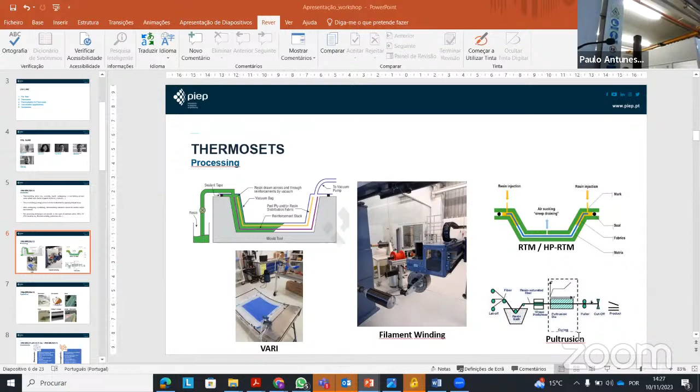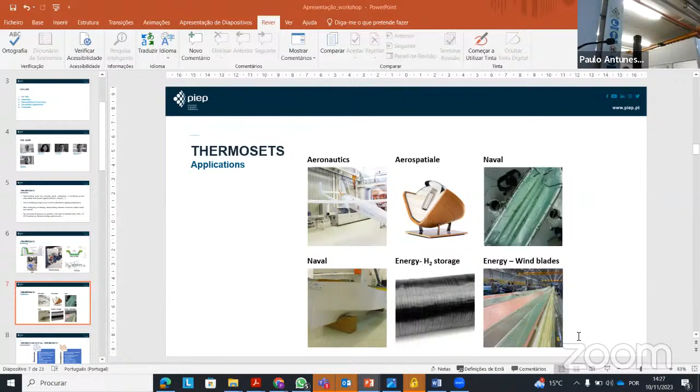Os materiais compósitos e os termoendurecíveis têm um campo de aplicações muito grande. Aqui foquei alguns dos campos de possível aplicação: aeronáutica, aeroespacial — esta é uma cápsula que vimos durante a visita, um projeto da ESA desenvolvido no PIEP, onde há uma estrutura primária feita com compósito de fibra de carbono. Indústria naval, aqui há um barco produzido também no PIEP. Wind blades, feitas por infusão por vácuo. Existe uma panóplia imensa de aplicações dos materiais compósitos de fibra contínua e das resinas termoendurecíveis.

As grandes diferenças entre os termoendurecíveis e os termoplásticos vêm das suas ligações moleculares. Um termoplástico tem ligações covalentes fracas entre os seus monómeros, e num termoendurecível há sempre uma reação de cross-linking entre as diferentes cadeias moleculares, que estão numa rigidez bastante elevada. O cross-link é que dá aquela rigidez, mas também provoca o problema de que, quando fornecemos energia térmica, não os conseguimos fundir. Tal é a resposta das ligações covalentes.

As resinas termoendurecíveis normalmente são rígidas, frágeis, mas também bastante resistentes. Novamente, a inter-relação entre as características moleculares e as propriedades mecânicas vem do cross-link, que lhes dá bastante rigidez. É um material com reduzida dependência viscoelástica — as propriedades variam com o tempo, mas não tanto como num termoplástico, havendo aqui uma vantagem. São quimicamente e termicamente bastante resistentes, mas têm essa grande desvantagem: não são recicláveis, do ponto de vista da circularidade.

Os termoplásticos têm ligações covalentes fracas entre os monómeros, não existindo ligações entre as cadeias poliméricas. Têm uma temperatura de fusão ou de amolecimento inferior à temperatura de degradação, o que nos dá a possibilidade de os processar, de outra forma não conseguiríamos. É o que acontece nas resinas termoendurecíveis, que se degradam. São estruturas semicristalinas ou amorfas, dependendo do material, existindo materiais semicristalinos e materiais amorfos — tendo aqui uma grande diferença para os termoendurecíveis.

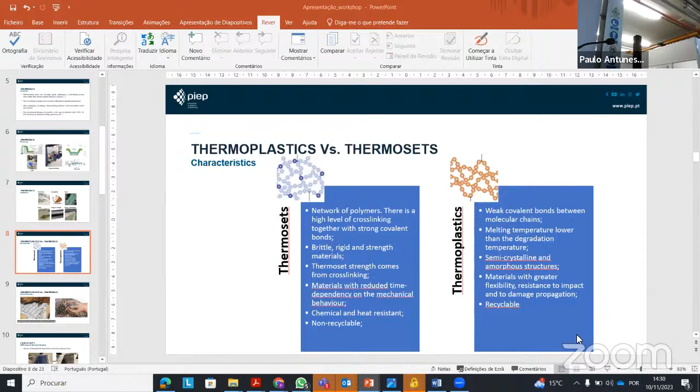Este é um problema grave que está a acontecer neste momento e que deve tentar ser minimizado. Já existem alguns trabalhos nesta área, principalmente um projeto europeu com uma pá de cerca de 62 metros, integralmente produzida em resina termoplástica líquida. Já começa a haver um caminho na circularidade e sustentabilidade destes materiais.

Estamos a falar aqui de um problema grave, não só este, mas de volumes de material muito grandes — estamos a falar também de barcos, de componentes de grande dimensão e grande volume, que são aterrados na realidade. A tentativa que se está a fazer é que estes materiais entrem na economia circular, e que no fim de vida seja feita a sua reciclagem mecânica ou química. O Gil François vai falar um bocadinho disso, da parte da reciclagem química, para depois transformarmos em produtos de maior valor acrescentado.

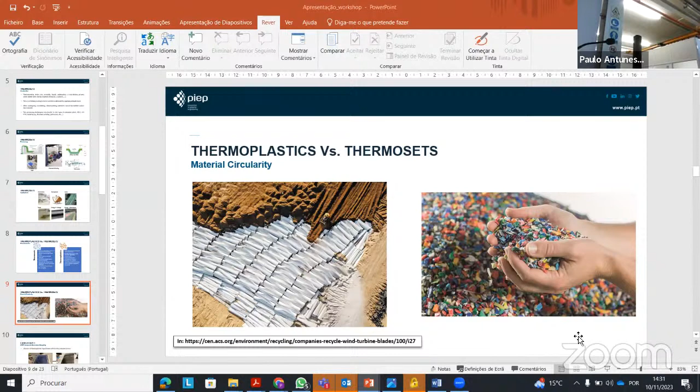Focando agora nos case studies, alguns casos de estudo que fazemos cá no PIEP: a nossa principal preocupação era saber que propriedades do material conseguimos obter do material infundido com uma resina termoplástica líquida, e saber quais são as propriedades mecânicas que podemos potenciar e utilizar no fabrico de outros produtos.

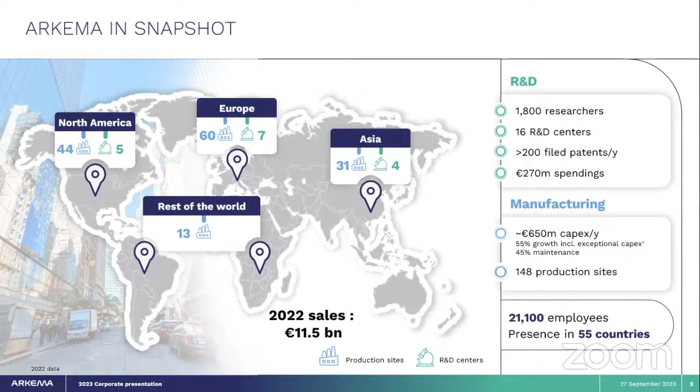In terms of R&D, it represents 1,800 research people, 16 R&D centers, and we have more or less 200 new patents per year.

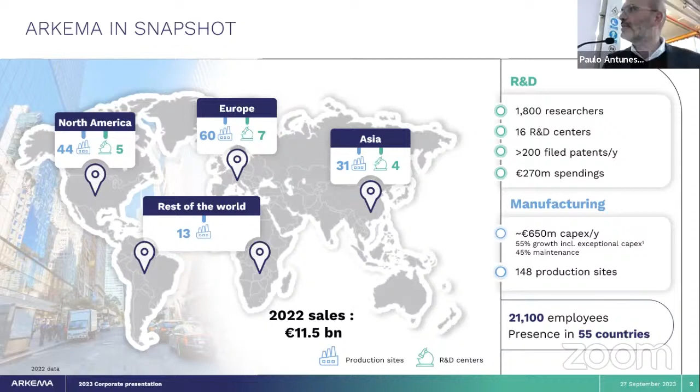In terms of activity, we have three main segments that we call advanced material, adhesive solution, and coating solution. Advanced material, I don't want to go into detail because this is not the topic of today, but just to give you a general idea of the company.

Advanced material is mainly everything dedicated to polymer. We'll talk today about Elium, which is a small part of Arkema. But the main polymers are obviously polyamide. We have different grades, polyamide 11, 12, PEBAX, and so on. PVDF, PEKK. After that, we have adhesive solution.

We are quite well known for our trademark Bostik. Maybe you know this name because it's a public product. I think a lot of people know Bostik. It belongs to Arkema.

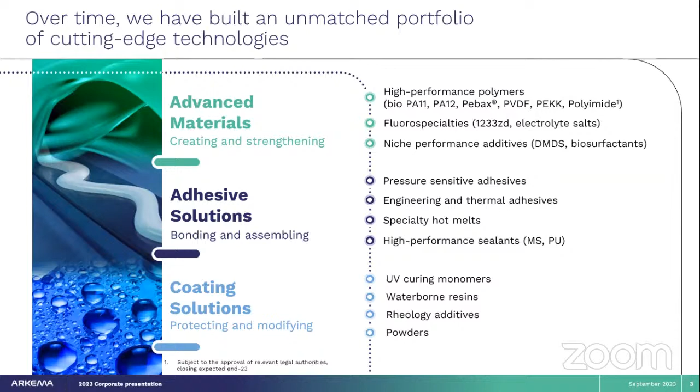The last one, I have to say, is the rest of the activity, what we call the coating solution. And we can find a lot of products like monomer, rheology additive for PVC application, waterborne resin for external application, and powder.

If we focus a little bit on the thermoplastic polymer, because Arkema is only involved in thermoplastic polymer, we have different trademarks. PEBAX is well known for sport application. A lot of ski shoes or sport shoes are made with PEBAX. PEBAX has the particularity of being made with castor oil, which is really a bio product.

So Elium, we will speak about after. Rilsan, this is polyamide 11 in a tape, which is mainly used for development in battery to make a hydrogen tank. Kepstan, this is a PEKK, similar to PEEK, which is well known for aeronautic applications with very high heat resistance.

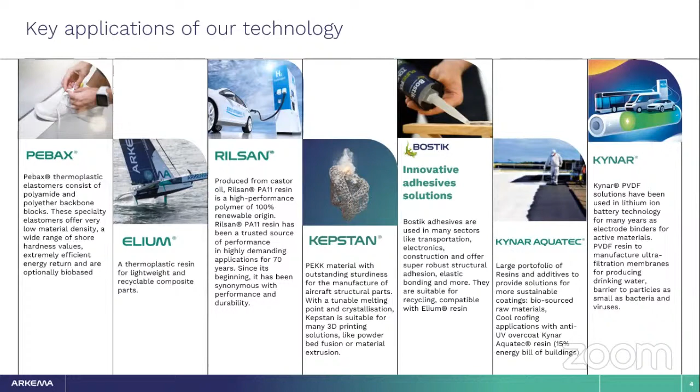Bostik, the glue. We work a lot and closely with Bostik because, as you can see later, this is a very good way to assemble Elium with Elium or with different parts, because this is the same chemistry - methyl methacrylate. Kynar Aquatec is like a paint for external application, and Kynar is a PVDF product.

So once again, very shortly, as you can see, we are mainly specialized in specialty products. At the beginning of the company, we had a lot of commodity products, and progressively we switched to specialty. So today it represents 91% of our sales.

We are present in different markets, as you can see on the graph: electronic, automotive, industry, building, and so on. And we have a very good balance between the three continents, because almost 33% for Asia, Europe, and North America.

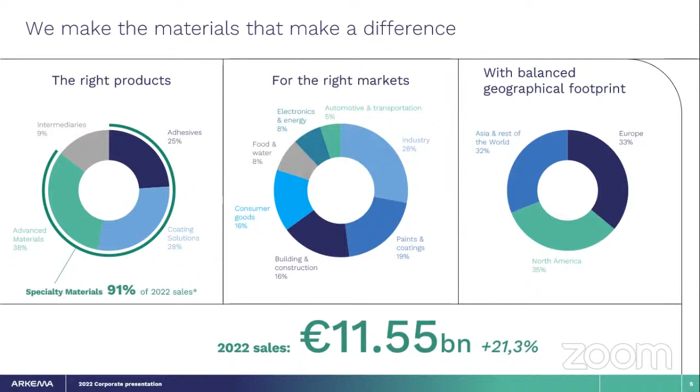Now, if we focus mainly on the Elium resin, so what is Elium? Elium is the only one thermoplastic liquid resin available on the market. What you have to keep in mind is that Elium, in terms of process and characteristics, is very similar to vinyl ester resin.

The performances are very close, and in terms of process, this is the same. You have the resin, you add the peroxide in the resin. As soon as you add the peroxide, you start the polymerization - this is a radical polymerization - until the final polymerization. It's very easy to handle.

Of course the main difference is that this is a thermoplastic product, and not a thermoset, which was explained very clearly just before by Paolo. So we have very good performance, mechanical performance, and particularly very good impact resistance. We have a lot of development in this area, mainly for sport applications.

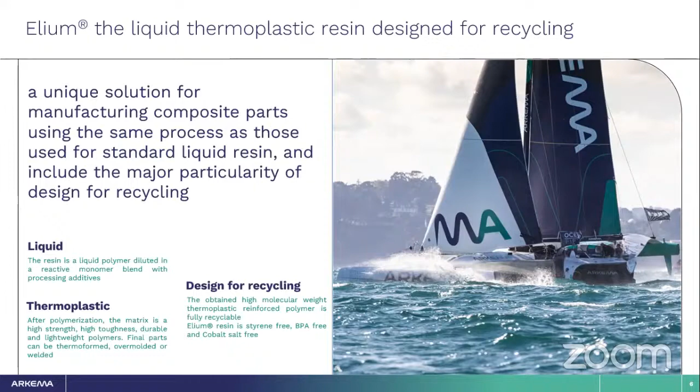And last but not least, there is recycling, because this is the main argument today. Everybody wants to produce parts which are able to be recycled at the end of their life.

Next slide, you have a view of the different businesses where we are present today. Number one is obviously wind energy, because wind blades - almost all wind blades - are made with epoxy resin, and it's very difficult to recycle this blade at the end of its life.

So Elium resin is a very good alternative for that. We have a lot of demonstrators, a lot of development in this area. It's a long-term development, but we already produce several blades. We have a good collaboration with the LM company - I will show you some information just after. After that, the second business is marine.

It's a quite funny marine application, because when we started with Elium a few years ago, I visited the boat manufacturer, and we tested the product together. But at this time, they were not really motivated to use a new resin due to the change and the price. For 2 years now, due to the change in terms of rules and legislation, and the necessity to recycle, they came back to us, and we restarted a real partnership to use Elium for both businesses. We are very happy now, because we have a very good collaboration, and they did a lot of announcements and newsletters with a company, Beneteau.

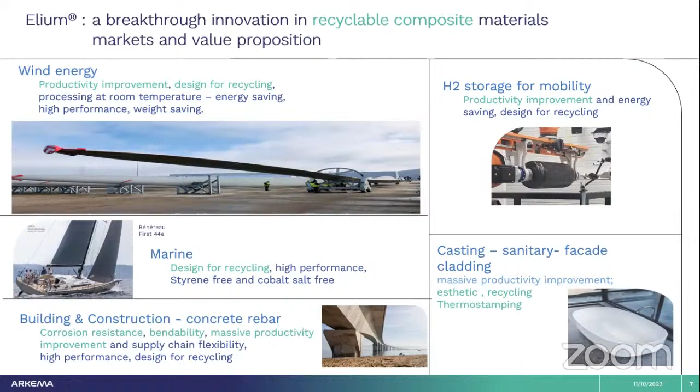Just to continue on the resin, what's interesting to know is that we are able to adjust the viscosity depending on the process. So for instance, for infusion, we have a viscosity of more or less 100 centipoise. For pultrusion, it could be 500. So really, depending on the process, we are able to adjust the viscosity.

After that, the reactivity, this is the same, we can change it from 2 minutes to several hours. To be precise, 2 minutes is really particular, this is for pultrusion, or for CRTM, for automotive parts. In this case, it is necessary to use a cocktail of different peroxides, and of course to heat the mold at a temperature around 100, 110, or 120 maximum. But we have the possibility to produce a composite part in a very short cycle time.

Peroxide, this is the standard product available on the market. After that, we will use one or the other one, depending on the request of the customer.

To finish on the fiber, almost all our customers are using glass fiber, because if we come back on the market, when we talk about boats or wind blades, they use glass fiber. So this is really the main business. But we know that Elium is compatible with carbon fiber, of course, though you have to use vinyl ester sizing. It's very important to have a good compatibility between the resin and the fiber. We also have other developments with natural fiber like flax, bamboo, for what I'd call a green concept.

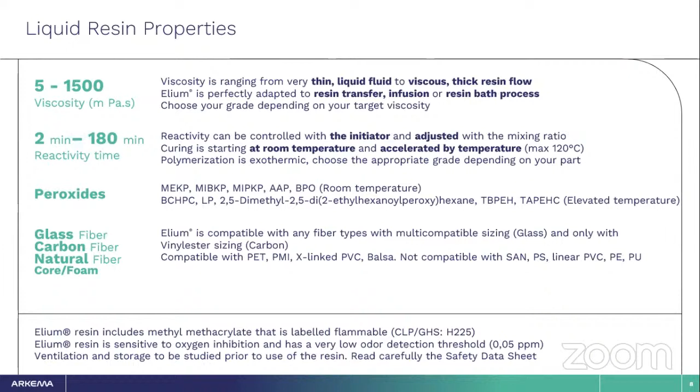To come back on the process, as you can see, we are able to propose some solutions for the different processes.

I just want to be clear that one process is not present on this slide: hand layup. Hand layup doesn't work with Elium, because Elium polymerization is inhibited by the oxygen of the air. In presence of air, you don't have a polymerization. I will show you just after, but we have a special grade for repair.

This grade is not so sensitive to oxygen of the air because customers, mainly boat manufacturers, say: okay, in case of damage, how can I repair it? I do not have a possibility to make an infusion when I am on the ocean or on the sea. So we have a special grade, but this is just for small areas, okay?

So if we come back to the standard process, infusion, this is really the most compatible process with Elium. We use it for boats, for wind blades, for automotive parts, but for small automotive parts.

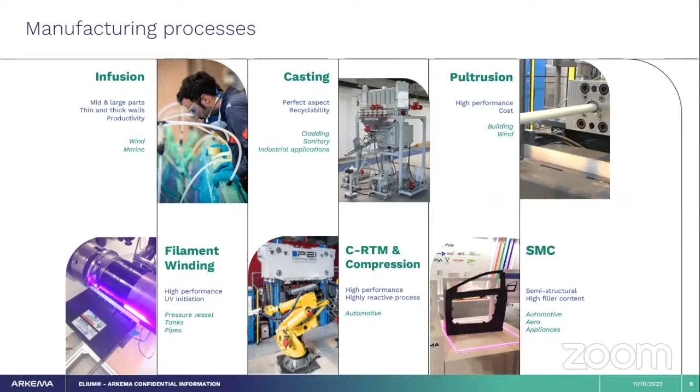Here you have a view of the different resins available at the moment in our portfolio. As you can see, we have two families: a family for room temperature process, and the other one for hot process, for pultrusion, for CRTM, and so on. After that, we have different families depending on the request of the customer and the type of peroxide and so on.

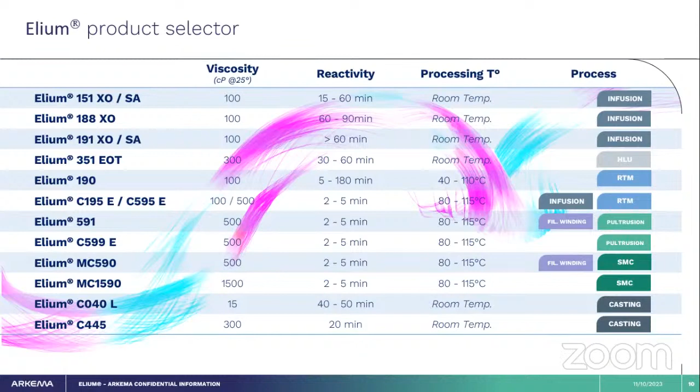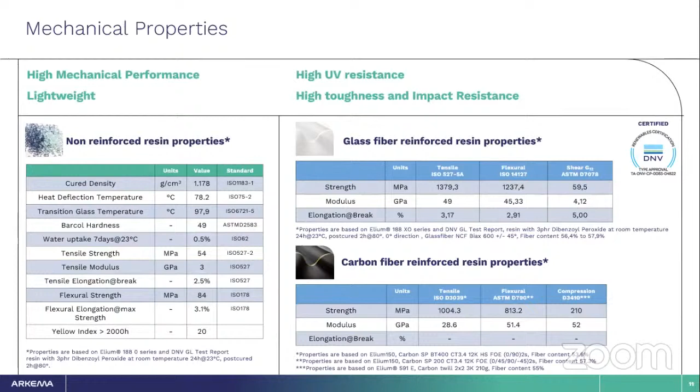So if we come back to the process, okay, this is general information, but just to keep in mind, because I know that Polo will show you the infusion process. This is the main process for composites.

Generally we recommend using a temperature of at least 20 degrees Celsius, because if the temperature is too low, polymerization will take a lot of time, and if it's too high, it will be the opposite.

We suggest doing a post-curing after the polymerization to reach the optimum result. I know it depends on the size of the part. For a boat, it's quite complicated to have a very big oven, but for small parts, when you have the possibility, it's better.

Release agent, this is something very important because acrylic resin tends to stick. So it's important to use the suitable release agent. The majority of our customers use release agent and gel coat for the parts. All the gel coats are compatible with Elium, it's not a problem.

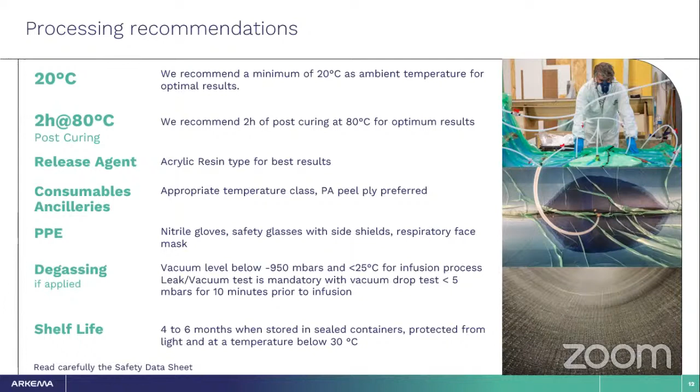Consumable ancillary, this is a standard product. Degassing, okay, it is better to do it if possible, but if you don't, it works, no problem.

The post-processing is something very important because it's thermoplastic, so you have some differences. The first one is in terms of machining. When you want to trim and drill the part, you can use a conventional tool.

Generally, this is a diamond disc to cut properly. But you don't have to go too quickly, otherwise the material will melt during the cutting. So you have to go quite slowly, or use a cutting system with a cooling possibility.

On the other hand, the main advantage is that you have no dust in the cutting room, which is a real advantage for the people in the workshop, since you do not have any dust.

For bonding, all the adhesives are compatible with Elium, so you can use polyurethane, epoxy, whatever you want. But we suggest using a methacrylate resin because in terms of compatibility, it's better, and in terms of recycling, because it's the same chemistry, it's easier. Something else interesting is that you do not have to do any preparation on the part, which could be a real benefit.

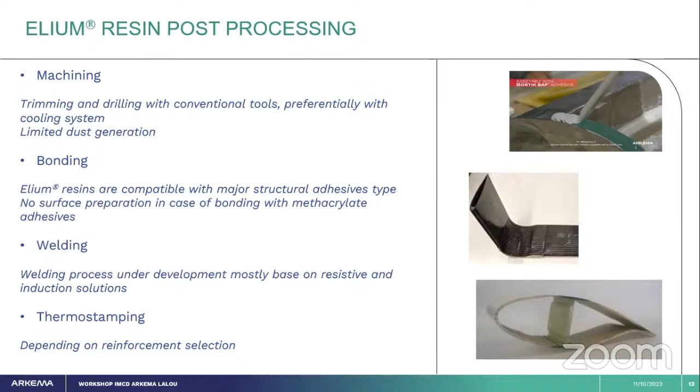Here, this is some major project. What we call the Zebra project is a European project. You can see on the picture the wind blade. This is 62 meters long. It's a quite big one.

Totally made with Elium at LM Wind Power in Spain, in collaboration with different partners like General Electric, Owens Corning, ENGIE, and so on. It's a real success. I think last week or two weeks ago we produced another one, 92 meters long. It's incredible, 92 meters long.

Beneteau, I already talked about Beneteau. It's a real success, and we are very happy for that because this is really a reference for us.

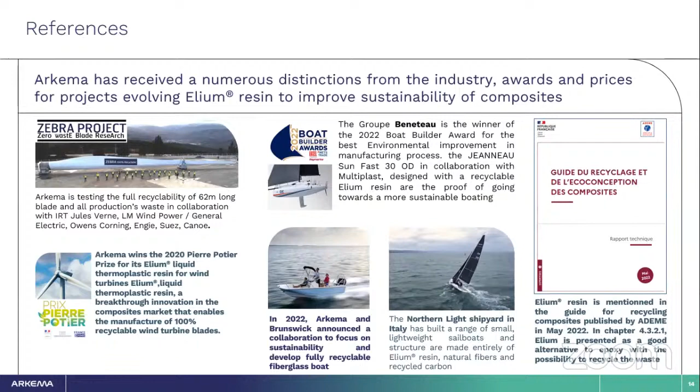In the US, we are working closely with Brunswick. Brunswick is maybe number 2 or number 3 in the world to make boats. So we have a good collaboration with Brunswick, and we have several boats made with flax, the natural fiber. We also have a good partnership with Northern Light company, an Italian company who has built several boats and attends different races.

Just to finish on Elium, to give you some basic information about recycling. We focus a lot on the boat because we have quite a big quantity of data on this. It's a real problem now, the end of life of a boat. Nobody knows how they can recycle or rebuild a boat. Dismantling the boat is a real problem.

I like the curve on the bottom, you can see the number produced depending on the year, and the end of life of the boat at 30 or 45 years after. We have to find a solution for that.

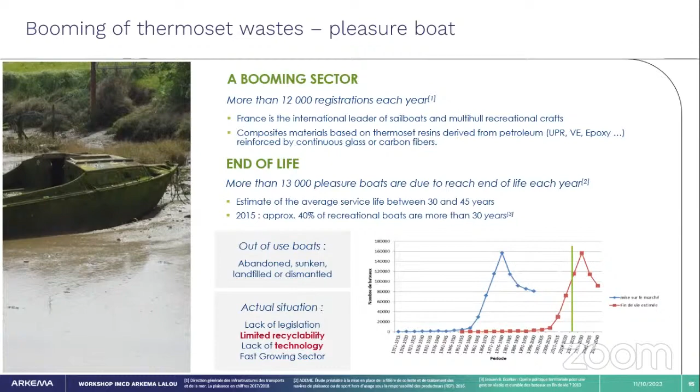I don't want to go into detail on this because different organisms already exist. One is very famous in France, called APER, and they are in charge of finding solutions for the dismantling of a boat. Of course, we are working closely with them, and you can have a look on the website if you are interested. It's really something very important.

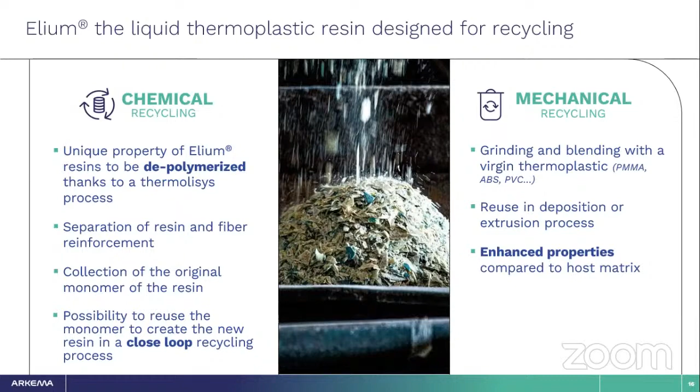Regarding recycling, we have two ways: the first is chemical recycling, and the second is mechanical recycling. I don't want to spend time on mechanical recycling because Paolo or someone from PIEP will introduce this subject in detail. I prefer to focus on chemical recycling.

One of the interests of chemical recycling, maybe it's better to show you. What is it exactly? Chemical recycling is what we can call a kind of depolymerization or thermolysis. It's not something new, because this process is currently used to recycle or depolymerize methyl methacrylate for a long time. But the difference today is that pure methyl methacrylate is not a problem because you don't have any external product and it's not a composite. As soon as it's a composite with different products, it's more complicated.

So based on this process, Arkema and some partners work to develop and promote this process. So what is it exactly? You produce the part, you have a composite part, and at the end of the life of the part, you have to find a solution. So the first step is always the same: this is the grinding. You grind the part to get small particles.

I can show you how we produce a small particle, and all the small particles are put into a reactor, like you can see here, at a temperature around 350 or 400 degrees Celsius. At this temperature, you will have a depolymerization, meaning you will be able to recover the initial monomer, the methyl methacrylate.

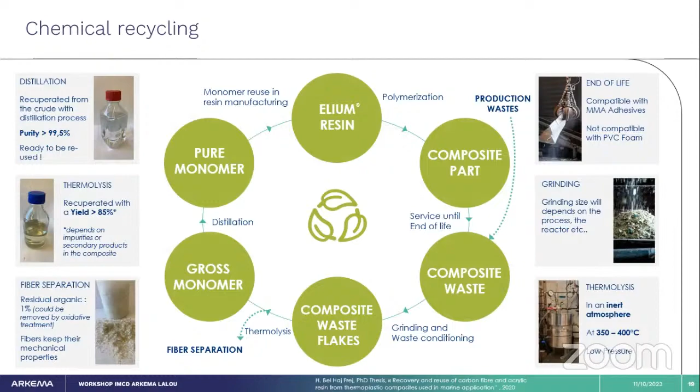Just to give you an idea, when we talked just before about natural fiber, it doesn't work with this process, because you cannot imagine what happens when you heat the flax or a bamboo at 400 degrees. You have a full degradation of the product. This full degradation creates some impurities which affect the yield. So we have to know exactly what to put in the reactor.

I come back on this because it's interesting as well: when you make a part by infusion, you know that you have some waste. This waste is coming from the tube, from the film and so on, and it represents something between 5 and 10% of the total weight of the boat.

And with the depolymerization process, you have the advantage that you are able to recover this resin. It's an advantage because when you are a big player in terms of boats, they have really several hundred tons of waste per year, and they have to find an alternative.

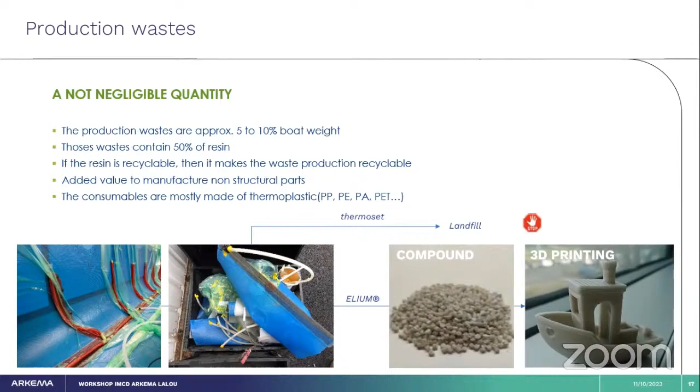I don't know if Paulo plans to discuss it, but I like the small boat that you can see on the bottom of the slide. This is a new development ongoing: 3D printing. So when we talk about mechanical recycling, instead of producing a flat panel, you can make a compound, extrude it to make a profile, and this profile can be used by 3D printing to make a new part. I think it can be an interesting process as well in development.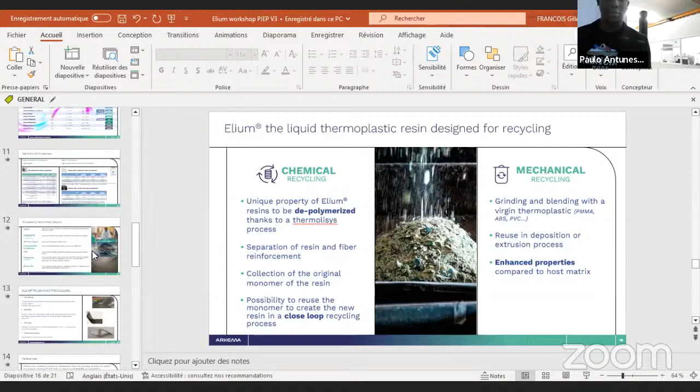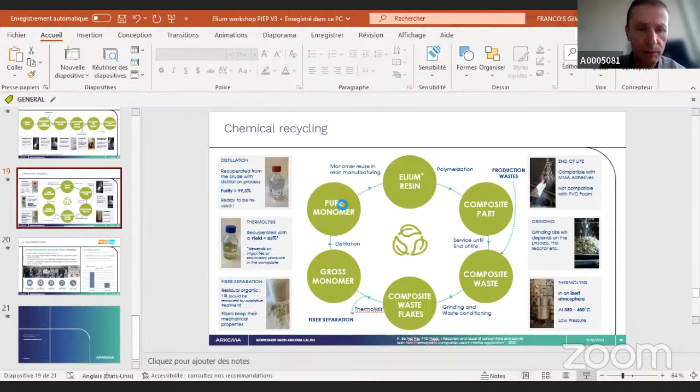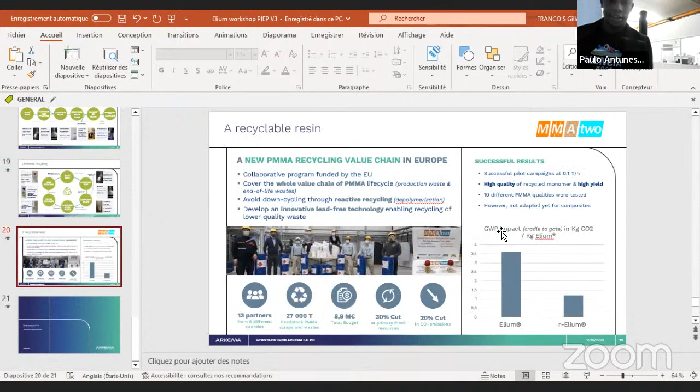You can see my screen? Yes, I can. Okay, no, it's not that one. Where is it? This one? No, not that one either. Can you go up again? I think, no, this one is reference. Maybe when we talk about that? Yes, those waste contain 50% of resin. Yes, this is your question?

Yes. Okay, because the waste is a mix of a tube with a film of infusion, and all the ancillaries that you use to infuse. So the resin represents more or less 50% of the total waste. You understand? Yes, I understand. You can see this on the bottom here. Yes, I can see - when you infuse, at the end you have parts, of course, but after you have all the consumable and ancillaries. Okay, thank you.